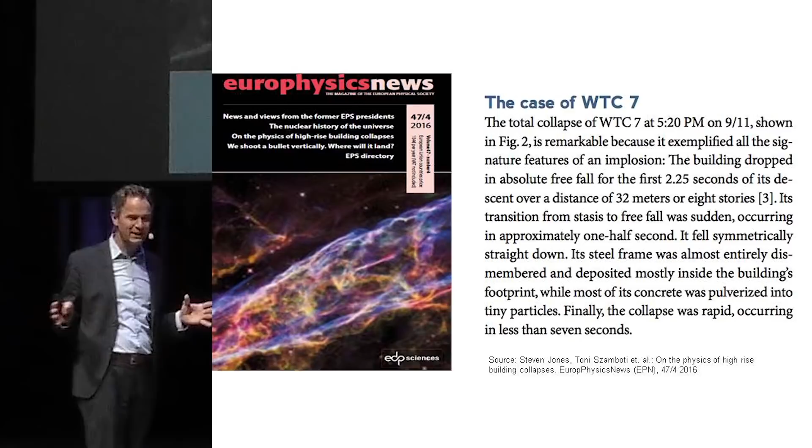The collapse of World Trade Center 7 at 5:20 p.m. is remarkable because the building dropped in absolute free fall for the first 2.25 seconds. I'm a historian, and on 9/11 many things happen, and it really makes your mind blow, the many things that happen. But you can ignore everything.

You can actually say the building dropped in 7 seconds. That's okay, you can even, if you have a long attention span, take in the 7 seconds. But if you really want to focus on something on 9/11, focus on these 2 seconds. How can a building go into free fall for 2 seconds?

Now everybody goes, oh, I'm not a structural engineer, I'm not an architect, I happen to be a mother, or a gardener, or a computer scientist, or an entrepreneur. Doesn't matter. Whoever you are, even if you're 15 years old or 82, if you see a building that moves into 2 seconds free fall, you will know that there is zero resistance.

That is free fall. Do we have something that I can drop? Maybe this bottle, not the glass. Yes, free fall, let's just see it. Now if I drop this bottle, everybody knows that it's not going upward, right? That's free fall, it just goes down.

And that is the thing we must look at if we see World Trade Center 7 going down. It did go down, there's 100% consensus on that. Nobody's saying, no, it didn't go down. Yes, it did go down. Before it was like that, and afterwards it was like that. I'm not a structural engineer, but I can see that is a whole lot of a difference.

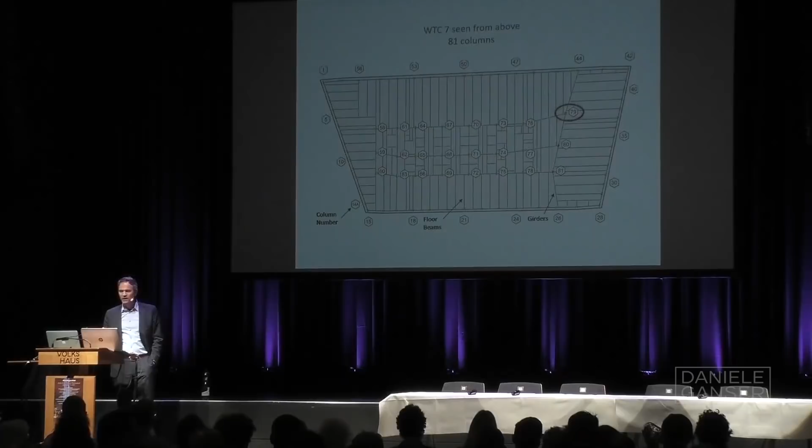There is total proof and total consensus that we have 81 steel columns in World Trade Center 7. And that's the only 2 figures that you have to memorize. I was teaching students here at Zürich University in 2004. They had to read the 9/11 Commission report. I was working as a historian at the history department.

Students always go like, what is important in this whole book? And then you say, just remember 2 things. And then you find out the most important figures, because otherwise they get confused. And if you want to know 2 figures for World Trade Center 7, remember the 2 seconds free fall, and remember the 81 columns, and keep these 2 figures in your head.

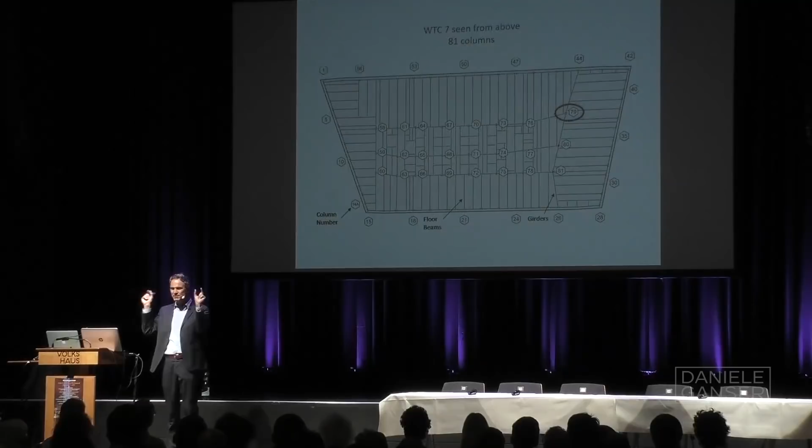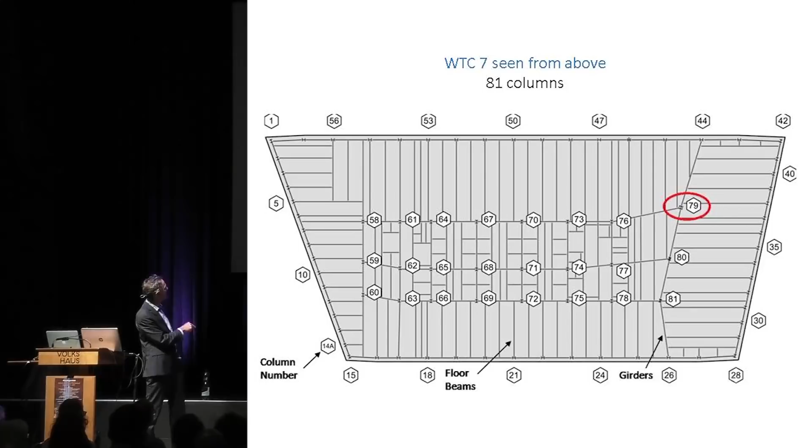81 columns, this is column 1, 2, 3, 4, 5, 6, 7, 8, 9, 10, 11, 12, 13, 14, 15, 16, 17. So, you know, they jump the numbers a little bit, but these are the columns outside, and these are the interior columns, and it ends here, 81.

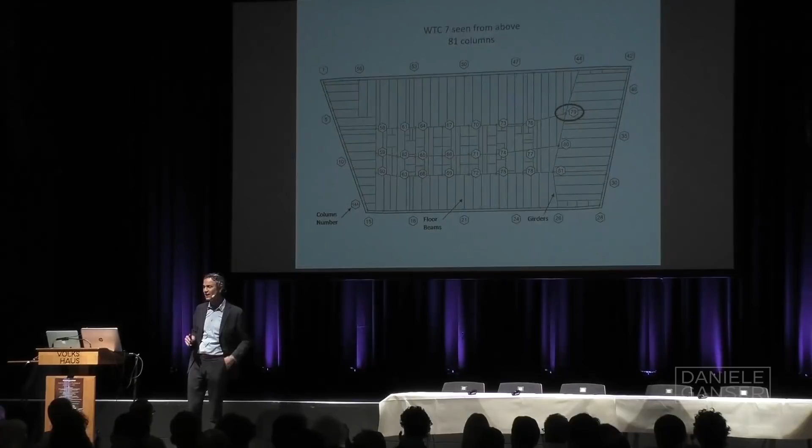And there is no dispute. Nobody's coming and saying, no, there were just 2 columns. No, it's 81 columns, everybody agrees. That's the fact. And it's 2 seconds free fall. There are even pictures, if somebody doesn't know how these columns look. This is when World Trade Center 7 was constructed.

They took pictures, so you can look at how these are solid steel beams.

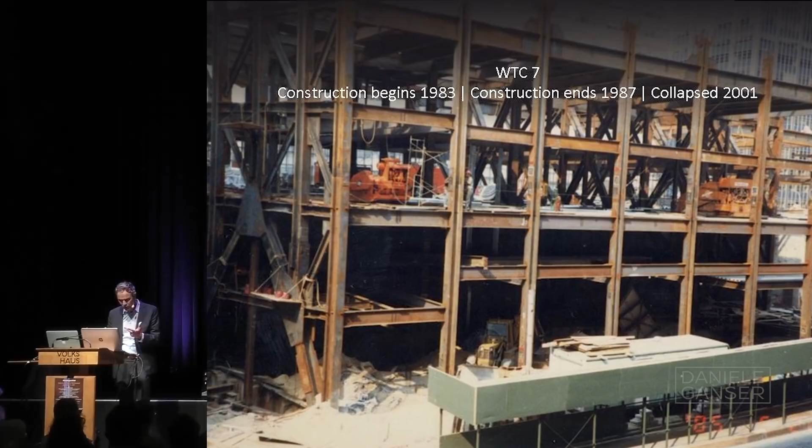Construction began in '83. It was over in '87, then people moved in. In 2001, it collapsed. So the building died as a teenager, okay? It's only 18 years old, that building.

And as a historian, I take the building as a human being. I go like, okay, what's the name of that teenager? World Trade Center 7. When was it born? '83. When did it die? 2001. Why was it only 18 years? Did it die from fire? No, it was blown up. Gee, tough life.

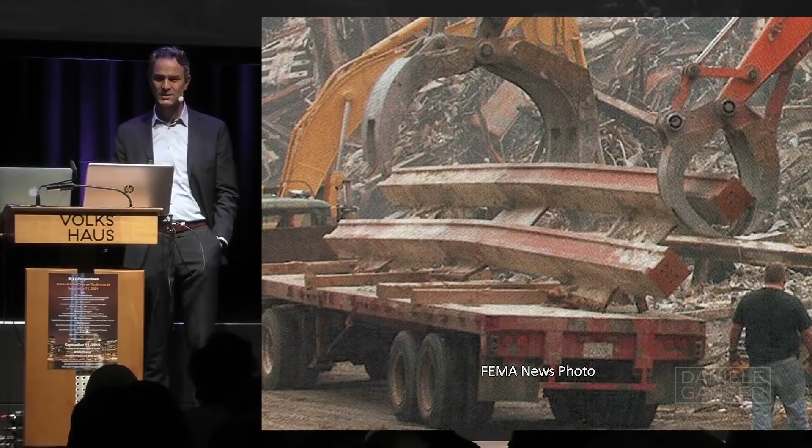The steel was removed. Get that? The steel was removed. Shouldn't happen. The steel should be there for every scientist to check what happened.

So that's the first point: 2 seconds free fall, if you can memorize that. And if you can memorize the 81 steel columns, then you're fine, you know. Then you've mastered our master class, right?

It's a very complex course, but if you know the 2 seconds and the 81 columns, you're fine. In fact, I'm going to repeat the 2 seconds and the 81 columns a few times because memory technique has shown that the key fact should be repeated 10 times.

2 seconds, 81 columns. Did you know a third tower fell? That's part of the debate we're in, okay? Some of your friends, some people here in Zurich, some people in Holland. George is here. Good to see you, George.

I mean, George van Houts is making excellent talks in Amsterdam. I was recently in Amsterdam. Excellent, you know. He's waking people up to the fact that there are 3 towers that collapsed on that day.

No, but I'm saying, you know, we are in many countries. We're now in Switzerland, but this thing is going on in the Netherlands. This is going on in the US. Niels Harrit is from Denmark. So this is a global thing. This is a global thing. And we should take courage from that.

So people in the US walked around and said, did you know a third tower fell? And many people in the US didn't know. I don't know how their feeling was, okay, when they read that. But that is one of the first steps for the 9/11 truth movement, that people need to understand how many

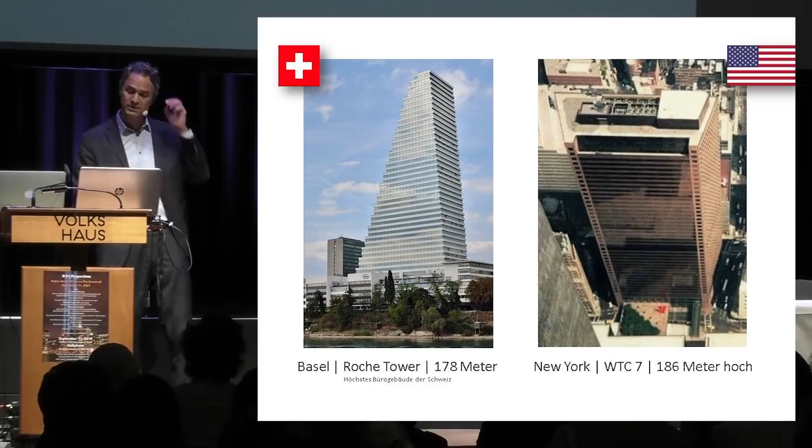My next point is that we had a debate here in Switzerland. I just want to show you the highest building in Switzerland. It is in Basel, not Zurich. It's called the Roche Tower, 178 meters high. If you walk along the River Rhine you can see it. So it's now the highest building in Switzerland. Obviously for the US that's nothing, but for Switzerland it's a huge building.

In 2006, I was working at the ETH here in Zurich, just across the corner, at the Center for Security Studies. I went to talk to our top experts in Switzerland, structural engineers, and I talked to Jörg Schneider, who's here today. I remember our talk, and I'm very profoundly influenced by it. I asked him, and his colleague Hugo Bachmann, how do you think World Trade Center 7 could come down? They asked me first, because they're very good scientists: was it not hit by a plane? I said no, it was not hit by a plane.

Was it maybe hit by a rock? I said no. Then we just looked at it on the video. We didn't have all the details. I said, just looking at the video, how it comes down. They couldn't be sure, but they said probably, with a high probability, it was destroyed by controlled demolition. I published this in 2006 in the Swiss newspaper Tagesanzeiger.

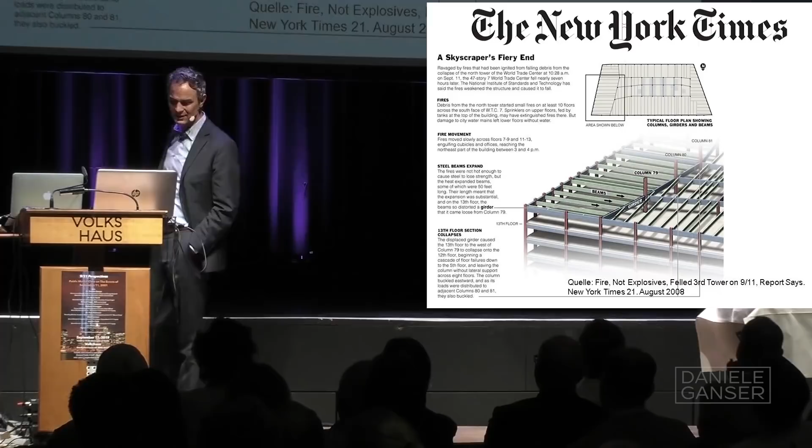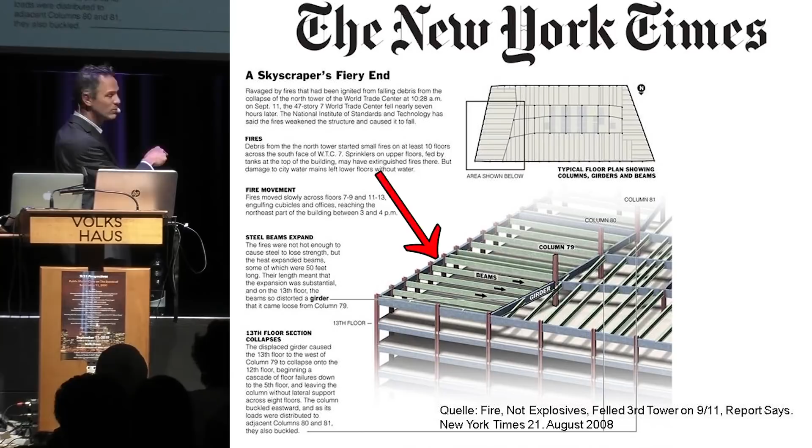The New York Times at the time reported on column 79, making a nice drawing showing it happened like that: these beams extended and pushed this girder off its seat here. Okay, that's the initial story for the fire theory. What we now know is, if you have heat there, the arrow shouldn't go in this direction, it should go in the other, because there's almost no resistance out there, whereas here you have the whole building. Or it should at least go in both directions. That's the story in the New York Times, and it says fire, not explosives, felled the third tower.

I've looked at that with different structural engineers. If you're a structural engineer, look at column 79 and the question of whether the girder A2001 was pushed off its seat at column 79. That's really, in a nutshell, where the 9/11 debate is today. I think personally, no, it was not pushed off its seat, and therefore fire did not bring the building down.

But you can disagree, you can go into the data and find arguments for why in fact A2001 was pushed off its seat. What I think is very good is this girder has a name that's very easy to remember: it's A, the first letter of the alphabet, and 2001, which happens to be the year of the attacks. So A2001 is a very important name to remember for the whole World Trade Center 7 story.

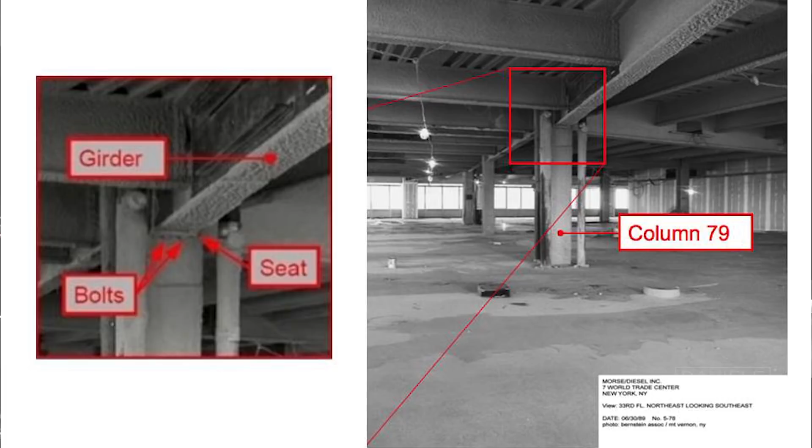Here's an original picture where you can see that the girder is actually very strongly fixed with bolts to the column. It doesn't just walk off the column. If that were the case, that a girder just walks off a column, then we'd be in serious trouble, maybe even in this building, I don't know. How many buildings do we enter where we trust that bolts are strong, that girders don't move off columns even if there's a fire?

We have a whistleblower, his name is Peter Ketcham. He's here in the middle. He's a very brave man, I think. You have a lot of brave people in the US, okay? They're in the peace movement, they don't want these wars, they don't want the lies of the government. And they need our support, from Switzerland, from Germany, from every country.

Peter Michael Ketcham is a mathematician. He worked at NIST from 1997 to 2011. He didn't work on the World Trade Center 7 report, and he didn't read it for a long time. But at one point he had his wake-up moment, okay? That's for everybody here in the room, in a different year. But once you have your wake-up moment, your whole thinking changes. He says: I did not contribute to the NIST World Trade Center 7 investigation or reports, but in August 2016, just 3 years ago, I had my wake-up moment.

He says: I began to read some of these reports. I quickly became furious. First, I was furious with myself—how could I have worked at NIST all those years and not noticed this before? Second, I was furious with NIST. NIST had reached a predetermined conclusion by ignoring, dismissing, and denying the evidence. This was published in Europhysics News in 2016. So basically, we have two people at NIST.

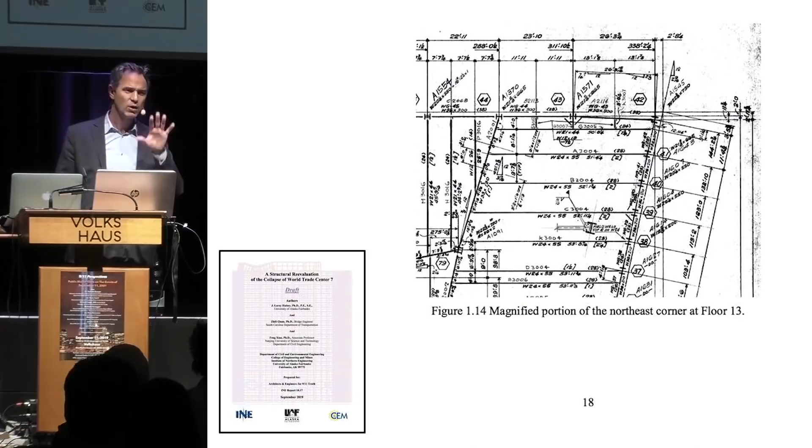If you have an either-or situation, you get it right. And the Hulsey report took all the original drawings of the construction of the building. They didn't just make an assumption, they had the original data. The building obviously was gone, but they looked at all the data, the beams, the girder, the columns. They had the official data from NIST.

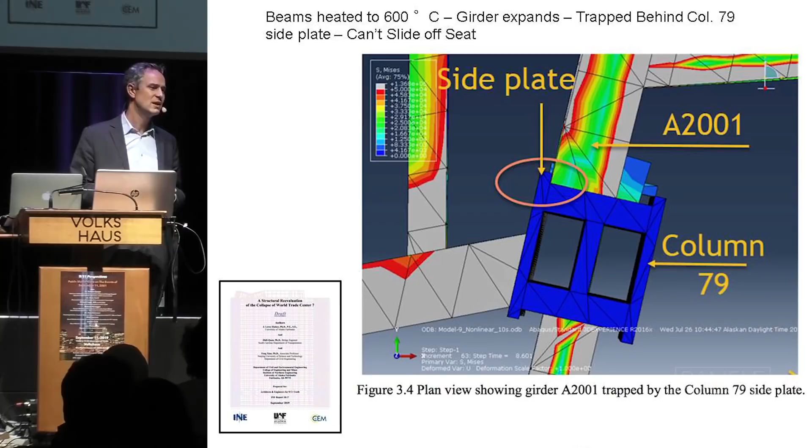They looked at the construction, how the beam was seated, connected, bolted, and found out that when you heat it, it can't move, it can't move away from column 79. And if it can't move away from column 79, then fire cannot destroy the building.

So finally, point 10: I was interested to see the reactions in the last 7 days to the Hulsey report. How does the media react? Was it in the New York Times? Was it on Fox News? No. But I found it on Zero Hedge. Now, Zero Hedge is not as famous as the New York Times, not as well known as the BBC, and not as much read as the Washington Post. But Zero Hedge said: the results of this study cannot be dismissed, it completely destroys the narrative that has been shoved down the throats of Americans for nearly 2 decades. That's Zero Hedge, 6 September 2019.

That's 5 days ago. Global Research: 'The official story of the collapse of World Trade Center 7, Building 7, lies in ruins' — that's from September 5, 2019. So you have Zero Hedge, Global Research, and then I found out that Off-Guardian even drew the attention of its readers to this conference we're having today. It's very funny, right? In the Off-Guardian they said there's an event, 9/11 Perspectives, in Zurich.